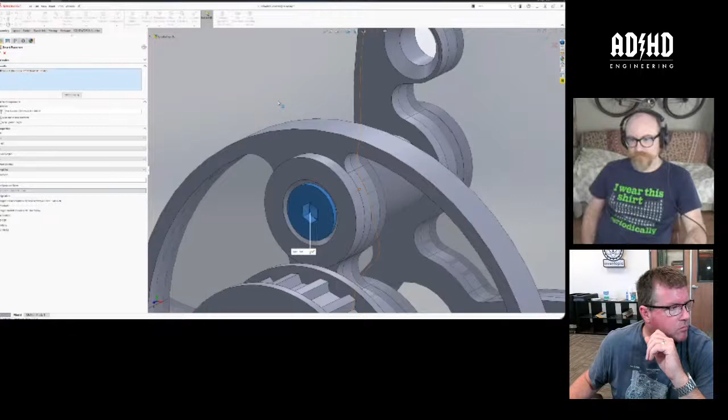And it's nailing down this process so that we can invite other people, like you guys, for example, to do parts for this. We have to come up with a more robust workflow than what's going on in Fusion right now, because I don't want to trash talk Fusion - I do it enough in my head, believe me - but there's a lot of ironing out you have to do, especially when you're making something that's not a bookshelf and you have 50 people working on it. Some standardization has to happen, and I think those single mega sketches with 50 sketch profiles, I don't personally think that's the answer. I think part of it comes from people assuming that's somehow less processor intensive, or that it makes the timeline shorter and therefore more efficient. Somebody used that term this morning, efficiency, and in reality I don't think that's efficient. It's maybe shorter, there's some brevity there, but I think it's inefficient because it does not convey design intent. I think it's the opposite of that, actually. But anyway, yeah, I definitely see what you're saying.

And by the way, for people on YouTube, sorry, we lagged out - YouTube ended the stream before I could reconnect. So now we have two streams today, and the other one ended without closure. Hopefully both people watching will reconnect. I think one of them was me. Yeah, I'm probably the other one. We always have more people from the Discord server than on the YouTube channel, but that's fine.

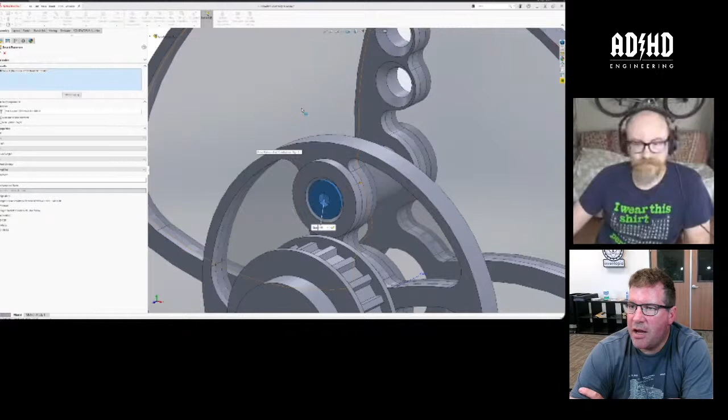So I just selected the length because I know that's how deep it drilled. There's a standard length of drilling that SolidWorks will do if you don't tell it to do something else, and that's dependent on the fastener. So an M8 fastener like this is going to be, I think, a 19-point-something millimeter depth, and that's just how it does it. You can tell it to go longer, and I think if you do, that 25 millimeter fastener would probably be right. But either way, in terms of what I smart-chose, fastener and feature, right?

Let's say if you have a screw, right? You have a plate with a clearance hole, and then another plate that has the threaded hole in it. For it to update those other things, do you have to tell it that this is a threaded hole on the far side? And is that an argument for using the hole wizard rather than just trying to make an appropriately sized hole in the sketch? You know what I mean? Do you have to tell SolidWorks that this hole is a whole entity which is threaded and it's M6? Do you have to provide that information on the front side?

I'll show you, just give me 2 seconds here. 1, 2. The answer to that is basically no, you don't have to do anything special. Oh, so here is our... wow, my computer's really good.

I have definitely actually manufactured a part and drilled the holes at clearance size when they were supposed to be 1/4 inch tapped holes, and only realized once I was trying to put it together. I said, 'Oh, these holes are too big, I need to tap these.' When I was designing, I just put a 1/4-inch hole in there, and didn't catch it in CAM, and I had to remake the part. Not my proudest moment as a machinist, but the thing about using the hole feature that I like is it avoids that exact situation.

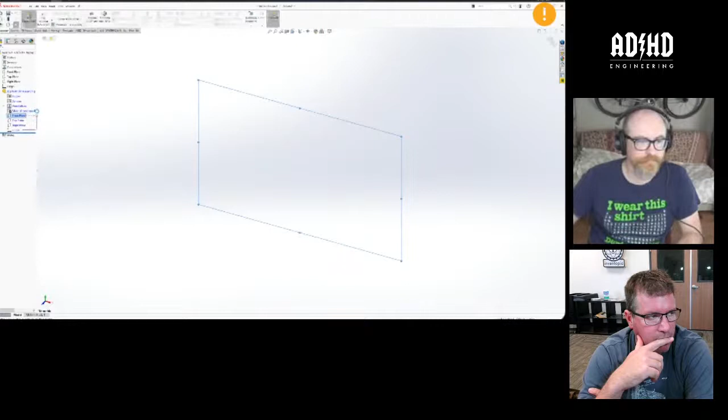Right, I'm about to show you. I just need to make... always make the fastener holes undersized, that could also be a solution. Yeah, and then you have a pilot hole to make them correct. As I'm designing stuff, if I have to slow down and provide that kind of information, it breaks my train of thought a little bit. Sometimes I just want to put these holes in so I can move on to the next thing. It's probably not a good habit.

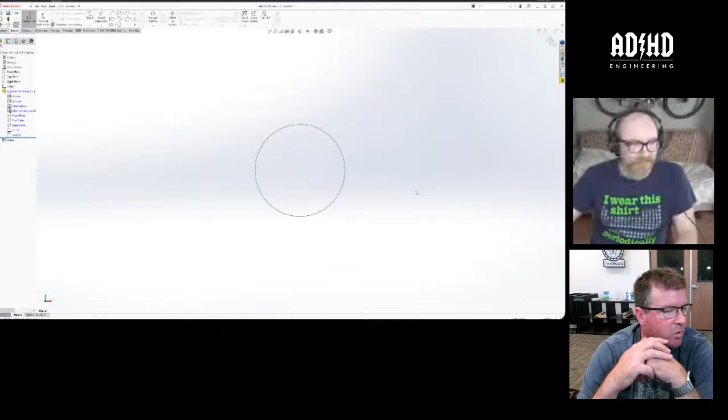Wow, my computer is so goddamn slow, what is going on, this is nuts. I don't know if you've been using much Discord streaming, but for my phone at least, that's the only case where it ever gets warm, when I even watch a stream on Discord. So I think Discord is really crappy performance-wise. I can literally utter 5 paragraphs before my mouse even responds to what I'm saying. This is so stupid, okay.

Sketch is done, now I do... come on, extruded boss base. Come on. Okay, let's go, let's go 20. Okay, so own it, let's... copy it. Let's see, another one. Well, you're making two bodies, come on.

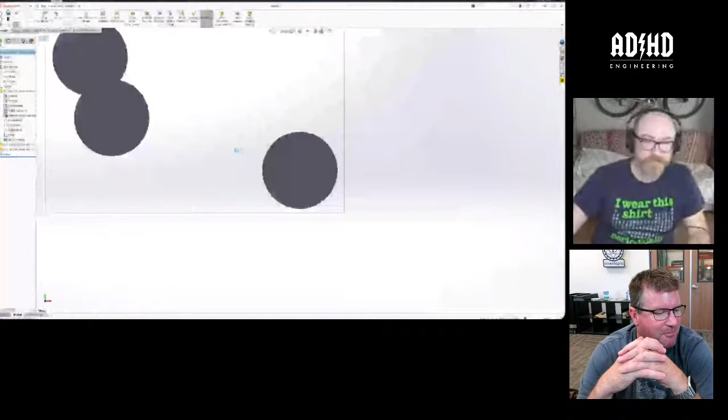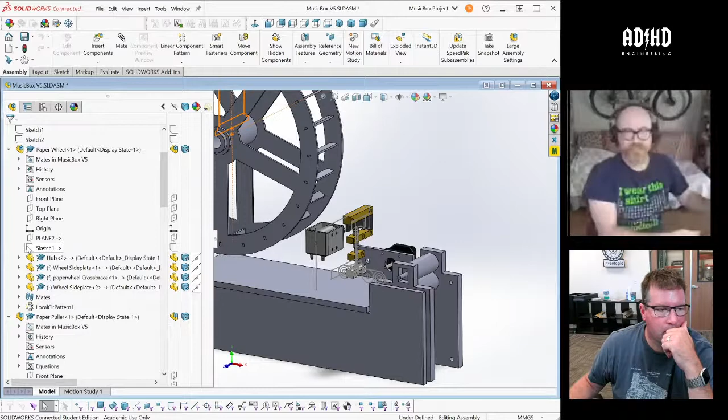Wow, painful. Actually, what's the state of that? Oh wow, it's totally melted. Your ice block has melted? Well, just a second, so it's one of these guys. Hold on, I gotta put it back in the freezer. Put it in the freezer. I don't know.

No, why can't you just liquid cool a plate underneath your laptop, like the cool kids do? I'm just kidding, no, there are no cool kids who do that. Ice blocks, there you go.

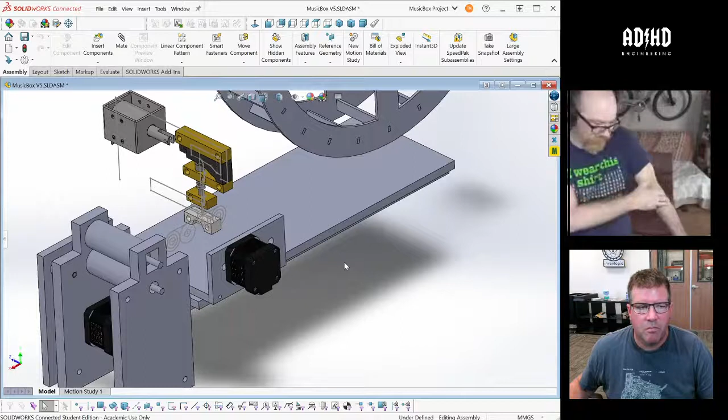Okay, so if you ever order HelloFresh or any of those meal kits, they come with a block of gel that you put in the freezer if you want to keep them. Yep, and that's what it was sitting on, and it literally melted through that. It's probably not great for the computer in the long term being around cold, wet stuff, but the thing is, look at what the computer's doing now, it's literally frozen. So I just put it on some even colder ones, these are from... this is so dumb.

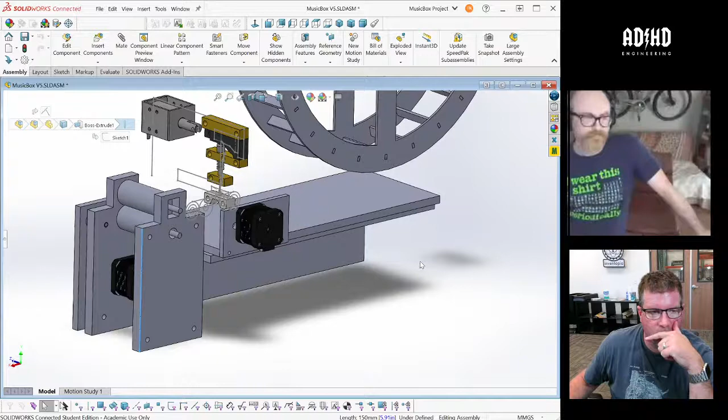It's good, let me... no, because I want to explain this feature. In order to do that, I needed to make 3 circles to drill through, and I can't even do that. Oh, maybe I should do it. Maybe you can coach me.

Okay, should I make an assembly or a part? Make an assembly. Okay, wow, I have my default resolution much larger on my monitor, so maybe people on YouTube can actually see the commands, and it'll be easier to see. All right, so I have an assembly with three different parts inside of it. Yes.

That's part. Okay. So David, can you hear me?

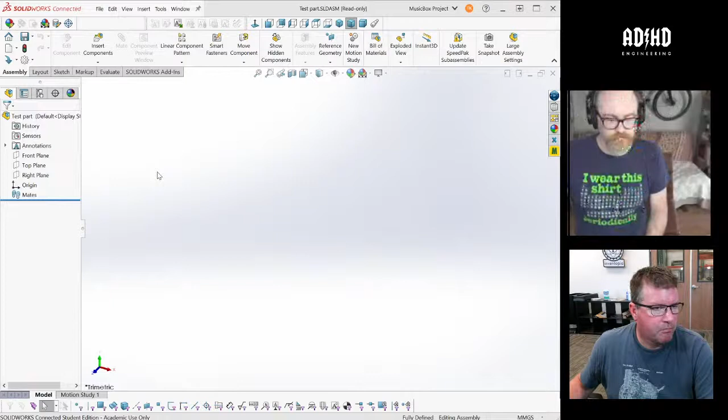Apple needs to come out with the M1X sooner, or the bigger one they always talk about, the 32 core version. You mean the Apple Silicon? Smoke everything.

Let's see, so I'm going to... oops, what the heck. SolidWorks is throwing me an error. Do you ever have that where you don't know where the error dialog box is?

New part. There we go. So yeah, get it. So 3 parts in one assembly?

Yeah, you were super low resolution, by the way.

Yeah, I need to call good old AT&T and ask them why the fiber optic internet service that I thought was going to be great for streaming is not as great as it should be.

All right, yeah, I mean, I can't really even see anything. Can you make... oh, I don't know if that's going to make a difference, but.

Are you watching my stream, you can see on Discord? The circle, you can't read anything. Oh, because I'm super pixelated. Yeah, interesting.

Oh, maybe I'll stop moving stuff for no reason. But I mean, I'm also on 4G from Sweden, so yeah, that could be the reason. Yeah, it's a...

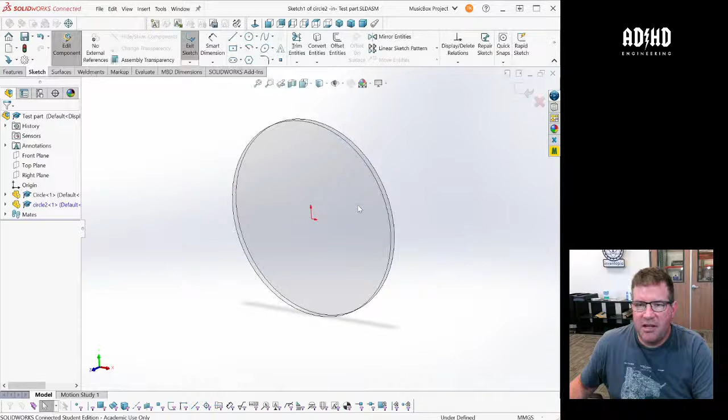By the way, SolidWorks Connected, even simple things like making a new part are difficult. It takes time.

All right, so this one's also 200 millimeters, but it's offset from that guy by 100 millimeters. And it's going to be... all right, so I have 2 different parts.

Now walk me through it, David. We're doing smart fasteners, right? He said 3 parts. 3 parts? Okay.

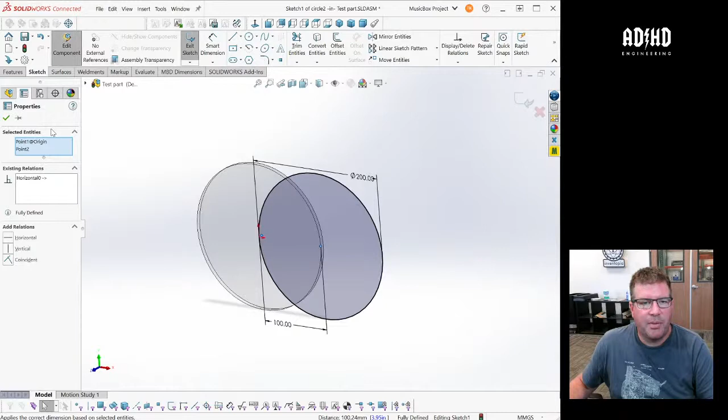It's pretty bossy, if you ask me. All right, so we got that part now. New part, bar.

Hey Brandon, do me a favor, can you grab one of the beers in there and bring it to me? Yeah, it's beer 30, the bluish one. Yeah.

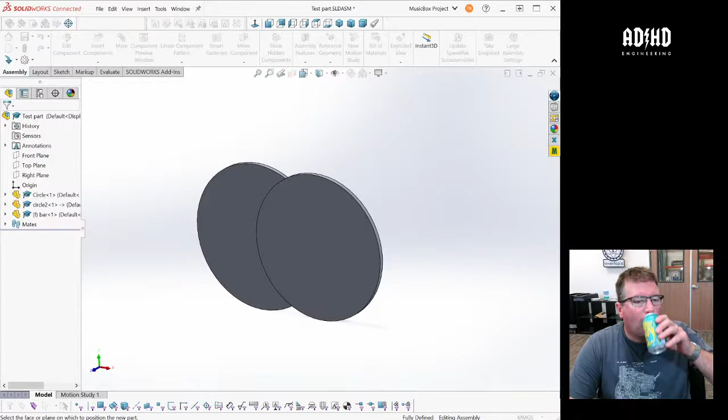A lot of times, yeah, I mean Sierra Nevada and Lagunitas and Tail of a Whale, I don't know, there's many of them. A lot of times the good stuff never makes it very far. Anchor Steam before, but that one is not available anymore. I don't know why, that was really good.

I love the... I have a feeling like the good beer and wine, I'm a former winemaker, which is why I like beer, never gets the best stuff. Actually sometimes on a national level, like Argentina makes some great wines apparently, but none of them leave. So okay.

All right, so we are doing... I'm assuming David's going to come back. I think we just completely lost him. I mean, we already lost him a small while ago, so I guess.

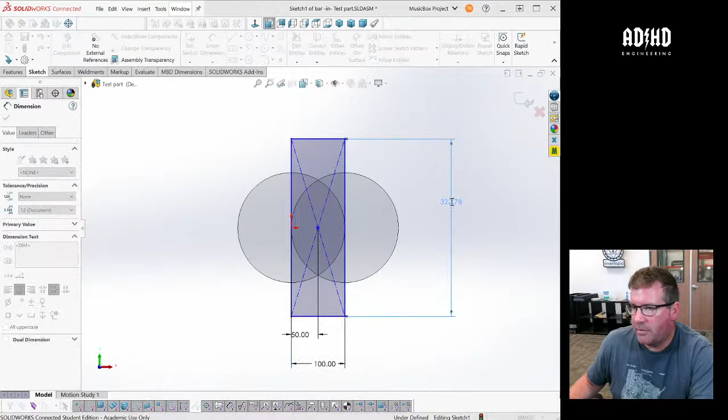Yeah, I noticed actually it might be on Discord, because we had 5 people in the Discord channel for a while, and now it's just you and me. That's true. So who knows?

Yeah, but now your quality is up again, I can read everything. Huh. Yeah, I have a feeling... only watching in a window, so yeah.

I've been threatening to call my internet service provider because it's fiber optic, so there's no reason why it should be like this. They probably just want me to pay more money for higher bandwidth, or they've artificially capped me, something like that.

In Sweden, we have a company that's basically cable TV, and you have fiber to the connection box, and then they use normal coax from there in their network. That's weird, so it's like hybrid fiber, they call it, not fiber all the way. What's weird is that coax isn't electrical, it's radio signals, right? Yeah, exactly, so it's basically fully analog, but in a cable instead of air.

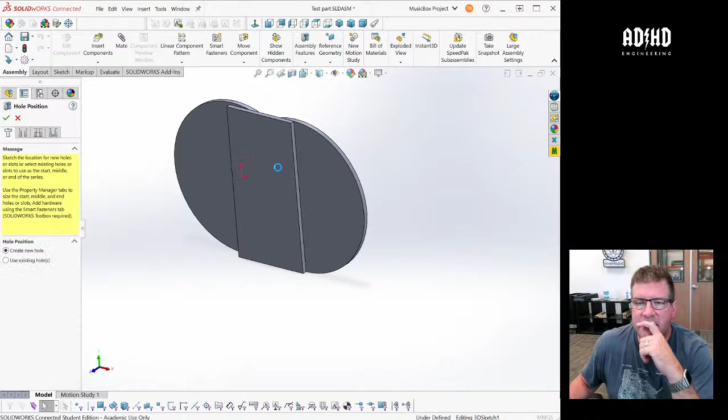Really interesting. All right, so even though David's gone, I think I found what he was talking about, which is assembly features right up here. So hole series, we're just going to play with this. Sketch the new holes or slots or existing holes. So, wow, okay.

Okay, what's the position? Counterbore. I think there was a whole... oh yeah, size 0, 0. So let's say this is, let's do metric, ANSI metric.

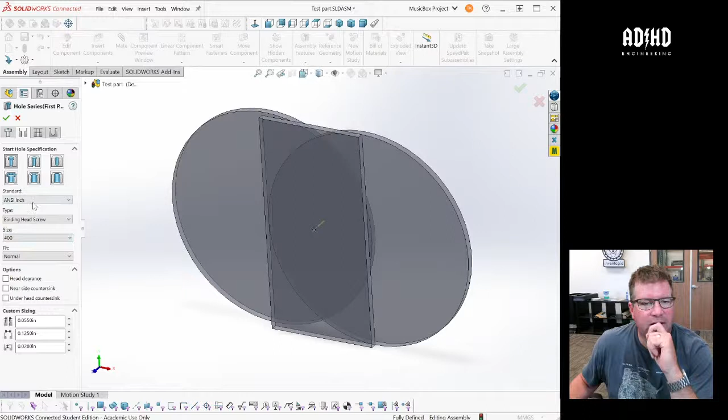Oh, so it actually is making the fastener and the... wow, that's super nice. Cool. And you can do countersink and everything in one. Oh, that's super cool.

Could you choose where to thread it as well? Let me look. Because this is just a through hole now. Yeah.

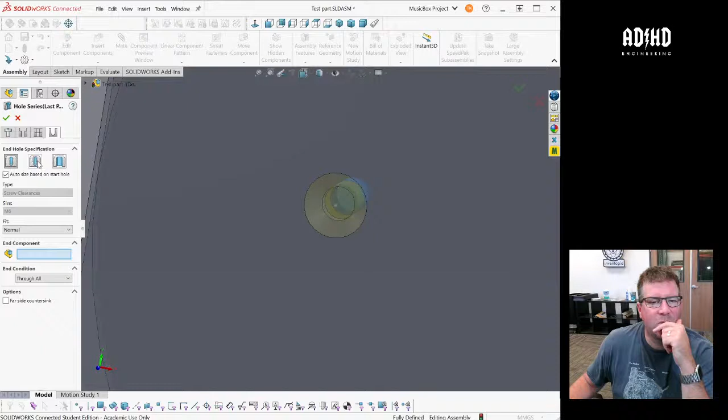What's this? Middle hole specification. Auto size based on start hole. End hole specification. Yeah, there you go. And the end one is going to be bottoming. Well, there should be a through tapped hole. No, here we go, tapped hole. Yeah, and you can have it bottom out halfway and stuff. Oh man, that is super cool.

Another point for SolidWorks. Yeah, because the alternative is to edit a chamfer in this one part, and yeah, that's super cool. What's weird though, is that's an assembly feature up here.

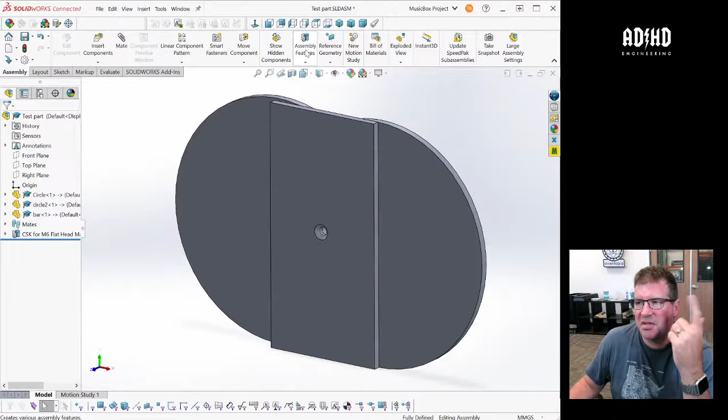And the way we normally draw stuff is to have the holes and then line the holes up against each other, so you're doing the alignment of the assembly with the bolt holes you've made for it. You're not doing the bolt holes later. Yeah, exactly, this is super cool though. It kind of changes my concept of how you would do this. I mean, then everything is already done, and then you just put in the holes where you want them. Yeah, it's like the backwards way of doing it.

I mean, I would always define like a common, like, oh, this is the origin, because here I have a bolt hole that I know will... right, yeah. But maybe if you have reference geometry where you just kind of say this is the bolt hole location, and you just have a point but don't actually draw the feature, then you can do the alignment based on where you intend to have a fastener, if that's the thing, right? I think on the MMX we have a lot of things that are concentric on shafts, right?

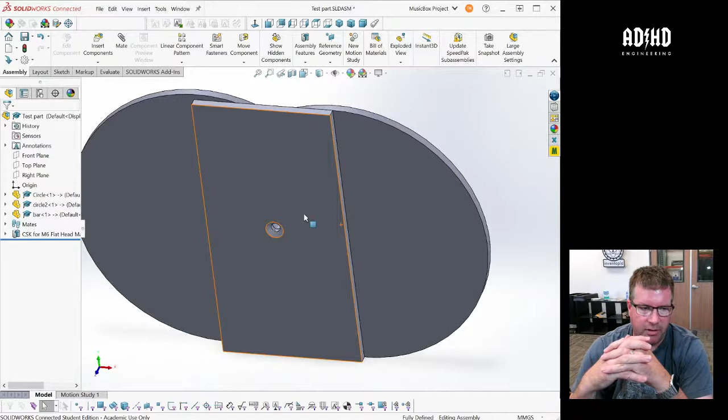Oh, now Mr. Comcast is back. Hey, I'm not back, well, I am. He's on his phone. My Wi-Fi is... no, I'm on my iPad. My Wi-Fi is down, I don't know what happened, but there's nothing on my Wi-Fi at all. El Monsieur iPad, it's funny. So I'm just going to be watching, but okay.

So we figured it out in your absence, David. We wouldn't have known that it existed. Okay, but we figured it out. We did an assembly feature, basically added an M6 bolt through 3 different things, and we were looking at it, and it looked like the middle hole specification, the end hole. We added a thread to the end hole. It gave us the tap drill for an M6 as the bottom hole, and it gave us a countersink on the top side. It was beautiful.

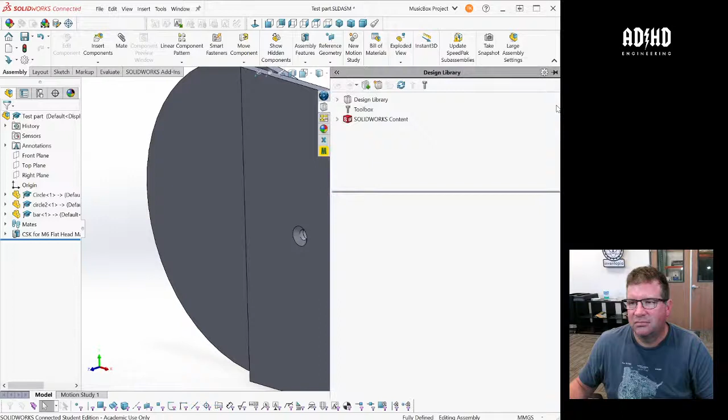Yeah, if you want to avoid interferences after you put the fastener in, then just make sure you select the one where it actually drills a hole that's the same size as the major diameter. Right, I don't know if you did that because you went pretty fast. But the other thing is, if you have your toolbox loaded before you start that, then you can add the fastener in that feature, you don't actually need to do it separately.

Oh well, let's try it again then. I just loaded the toolbox, I didn't have it before. Why is it so wide? Yikes! All right, ANSI metric, bolts and screws.

Are you going ANSI, huh? Oh, what should I do? Well, I would just pick ISO personally, but it's your call, you can do what you want. I don't think I know the difference. Well, I think functionally there probably isn't one. Yeah. But this is a European project. Good point.

Who is that? Sorry, who is that? Someone very cute, that's my 3-year-old.

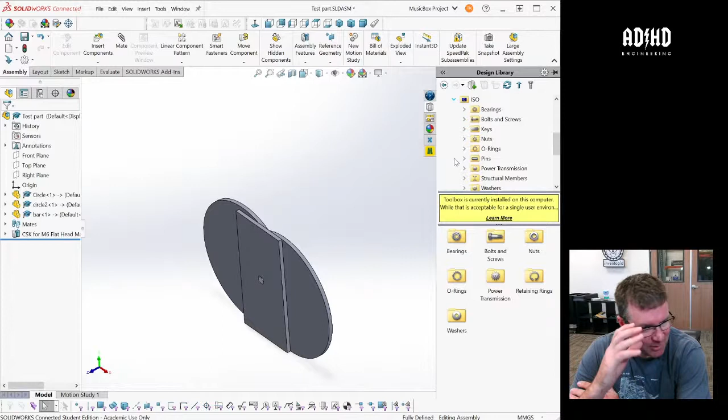That happens with Maureen all the time, and she's very clear she does not want her kids on YouTube at all. So it's always drama if a kid rolls into a room and starts making noise or is on camera. But she has a kid, maybe 4. Yeah, I love that. I love the kid intrusions.

All right, so let's try. He's just playing Fire Track here. I can have him on if you want to hear, but I guess... So we're gonna do another hole series, we're gonna put it there.

Oh yeah, now you got smart fasteners available too. That's good, I see it. Oh yeah, the smart fastener tab is there. That's cool. So this one's going to be an M10, countersunk and counterbore. The last one is also going to be a threaded tapped hole, M10. Make sure you select the end component. There you go.

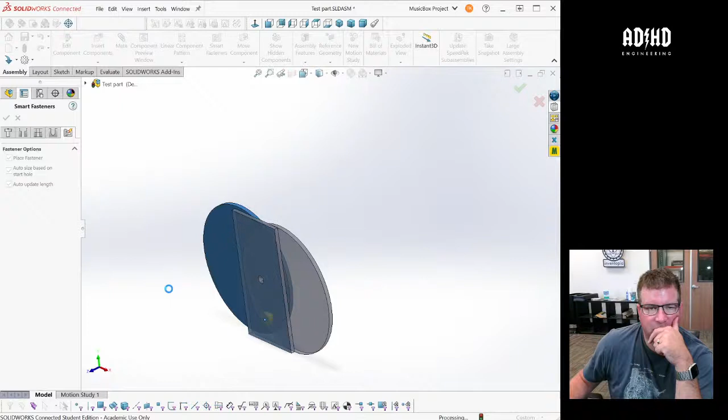Awesome, place fastener. Working. And I guess you can define how much stick out you want, and the length and everything. Yeah, you can do all that stuff. Oh man, could you add nuts on it and washers and stuff?

As well? Yeah, you see how it says add to top stack right there? That's where you put washers. Oh my gosh, that's the top stack. What about the bottom stack? Pull down on that menu. See, there's a... there you go. Oh okay, never mind, see, I added a washer up here.

Well, because you threaded the bottom one, it's not going to ask you for... Okay, well let's go back then, see if it's a clearance hole. Now I'm going back. Yeah, there we go, bottom stack. Dude, that is sweet. Wow, regular flat washer.

That is... now, what would be awesome, Tim, is that it allowed me to...

Kooky saying, "Don't tell Martin about the washers." That's so true. If you're like, okay, how many washers can I add here?

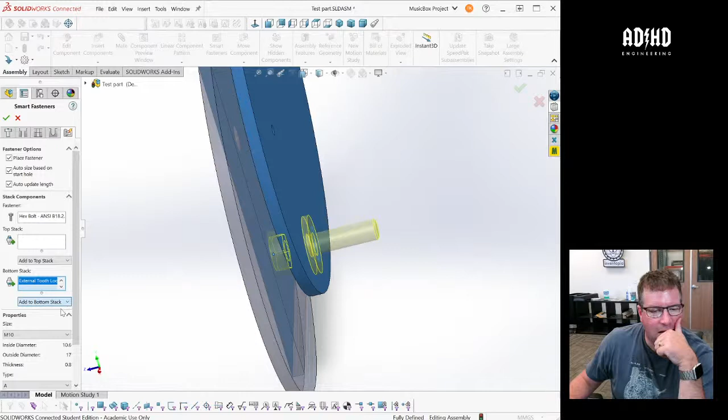Oh man, so external tooth lock washer, adding that on there. It takes a second for it to populate, but there it is. Hot damn. Yep. Hex nut style 1. I don't know what these... does it have the entire McMaster catalog here, so you can do?

I hope so. So okay, I'm glad you brought that up, Lance, because the one downfall to all of this is that they're not currently set up to have McMaster part numbers assigned to the smart fasteners, so the McMaster add-in isn't going to see them. Yep, and I actually haven't really tried to override that somehow. I want to figure that out, because it gives you that shopping list. Damn, yeah, look at that.

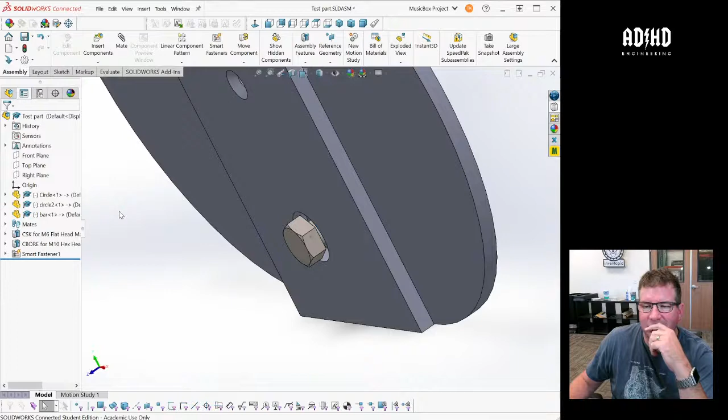Of course I did, this is not right. I added... I have to change that. Yeah, but Tim, this is CAD, man, this is how you design stuff. Yeah, this is the simple stuff. Yeah, and I know it's exciting, but...

Yeah, what did I do with the fastener? I need to change that. Hex bolt. It was something you did in the first... I mean, you added the washer to the top stack. It was the kind of hole at the beginning that changes. Yeah, but I would think that you...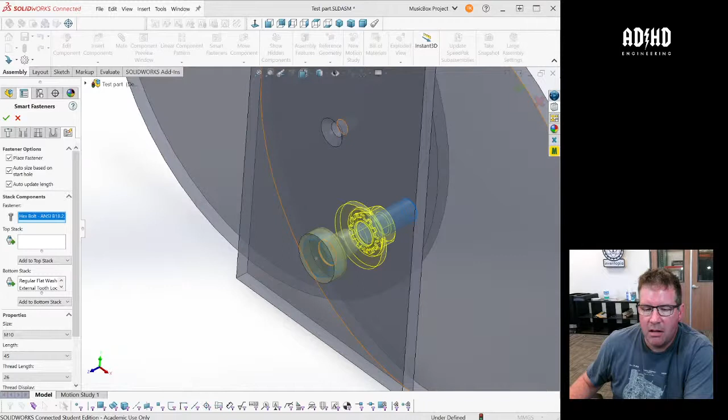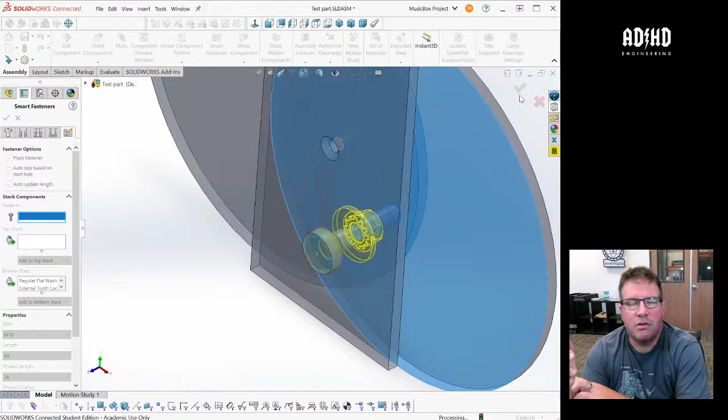All right, so David, while you were gone, we were asking about this, because a lot of times we use it in the context of an assembly, right? We will use fastener locations for doing our mates. So, like, let's say over here in Music Box Land... no, this one. It's not gonna let me change windows until I get out of this dialogue. Okay, think about it, SolidWorks. But anyway, so if we can use this feature to basically populate all of our hardware, which I love the concept of, especially since it's going to add the nuts and all these other things, which you'd ordinarily be going into some library for.

Then it should be the case that, in order to mate different parts with a bolt in the assembly or even in a subassembly, we shouldn't make the mounting holes in the individual parts and then use them for alignment purposes. We should instead make a reference geometry, like an axis through that point, or a point for where the fastener is going to happen, and then align those reference geometries.

Yes, I'm glad you came to that conclusion, because that is exactly how you want to do it. But you can also use an existing hole, by the way, if you wanted to. I think using an existing hole is kind of lazy, especially considering you can do it here.

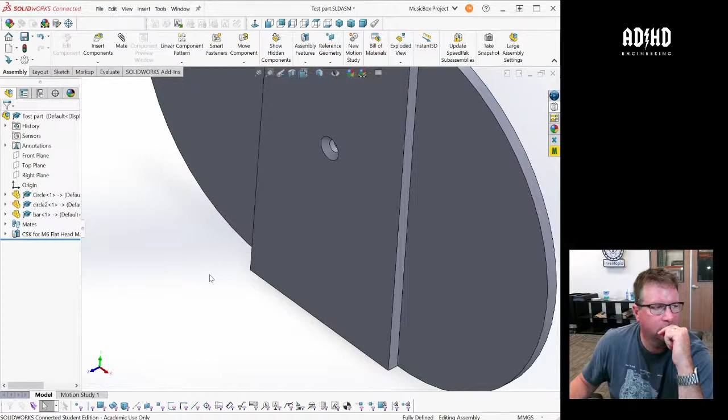If my computer hadn't crashed and I lost all my Wi-Fi, I'd be showing you right now how I built the crankshaft. The way the crankshaft and all the components are aligned, there's an axis that goes through it, but that axis isn't defined by the crankshaft or anything. It's defined by the intersection of the right plane and the top plane, and all the positions of the components are defined by offsets from the center line.

So none of the parts actually have reference features, like a face or anything like that. None of it is based on that. It's all planes. So if you do it with enough planning, you don't actually need to line up holes at all.

Well, I like this because aligning parts based on mounting holes presupposes it, removes your ability to change the mounting holes. Exactly. And I think that mounting hole should be a dependent feature, not a driving feature.

Right. So speaking of which, let's do multiple holes on this face, and you can edit the sketch afterwards. But before you do it, I want you to select a face.

Doing that guarantees it's a 2-dimensional sketch, not a 3-dimensional sketch, so when you go and edit it, you'll have a different kind of control over it. If you had just selected the feature, it would have made you go through a 3D sketch. But now you could put your holes wherever you want them, and then in that sketch, or even afterwards, you can do it just like the hole wizard, where you just put points where you want them geometrically.

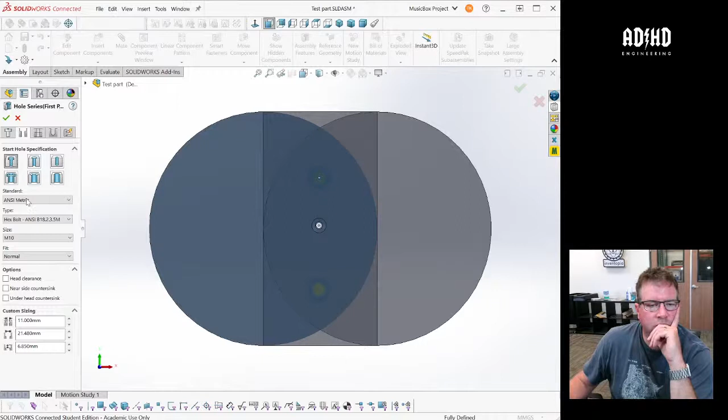Oh, so here's where I had gotten this. This is going to be a hex cap screw, and it's countersunk. That's where I got the other one wrong. Fit normal. Okay, middle point, auto size. Last one is going to be, end component is this one. End condition through all.

Place fastener. Love it. And now we have, I still have a hex cap screw. I wonder why it did that. Oh, that's weird, socket button. There we go. Actually, I didn't even want that.

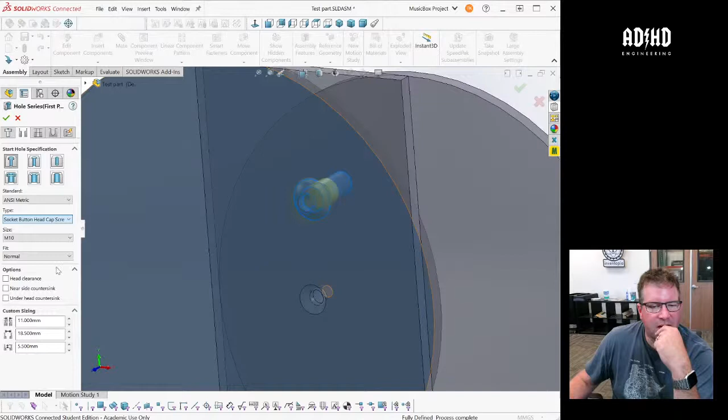I want socket head cap screw. I don't want it to be button. Yeah, there you go. It just takes a while. Sometimes you make changes and you think it's going to happen instantly, and it needs to talk to its buddies up in the cloud.

Does that fit? It does fit. And it's just, but you see now that actually the countersink is too thick for that top plate. I have an M10 bolt in a 6mm plate.

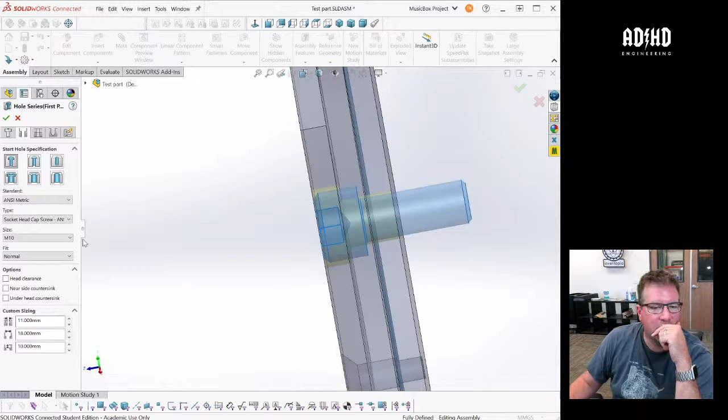So options, head clearance, is that it? That's probably it. No, that makes the counterbore deeper. Oh, or it makes it wider. Try a negative. Oh, it makes it wider? I think so. Oh, no.

It still doesn't line it up right. It's still lining it up from the shoulder here. Well, the shoulder is where socket head cap screws are measured from. Yeah, but it's not lining it up from the bottom of the countersink.

Anyway, this is super cool. We don't need to totally dial this in today. Yeah, right. But I do like the implications, I like discussing the implications for it.

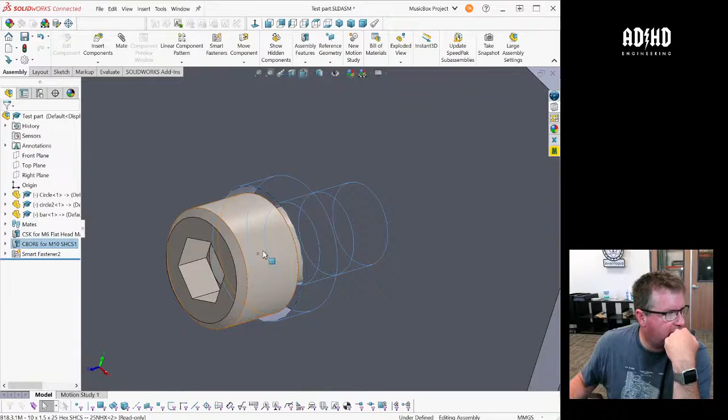So I think a big risk would be that you would miss clearances in the middle parts when you do it like that. You don't necessarily go in and check that you have the correct clearance in the sketches if you just add random fasteners later. Of course, that's part of it, but that would be my main question about this approach.

Well, there are two features we haven't even looked at yet. They're both under the Evaluate tab. One of them is, once you have your fasteners in there, you do what's called an interference detection, and you can also do an alignment check where it looks at your fastener holes and sees if they line up, and it will do that for you.

Awesome! You can do weld beads in this. Yeah.

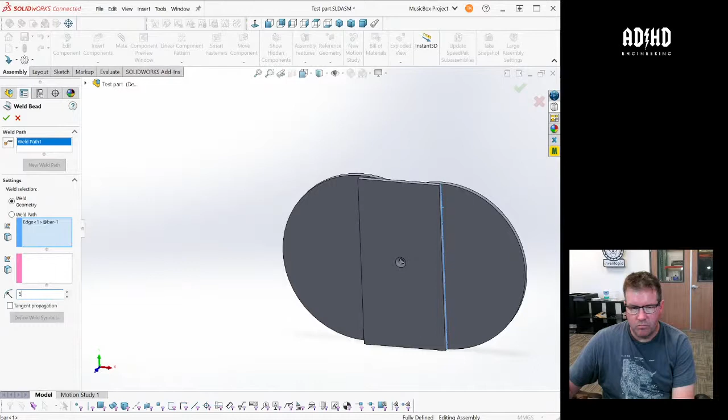Why wouldn't it do a weld bead for me? Weld path right there. Dude, did it do it or did it not do it? It didn't do it. No, I mean, I saw the weld symbol. Yeah, weld bead.

Oh, it wants to do it between here and here. It's looking for faces. Yeah, is that going to do it? But there's no representation of where the weld is. It's not like in the features here.

Right, but there's a folder in the feature weld tree. Folder—hot damn, there it is. Yeah, and they're both in there. Maybe I don't have visibility for welds on. There it is. Oh, that's probably it, actually. Yeah, yeah, that is it.

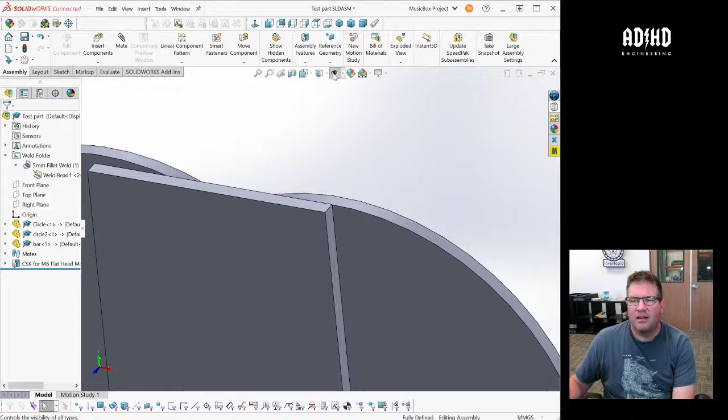Come on, delete that second one. Yes. I hate the fact that you can click this eye and not click everything else. Come on, you got to click the actual eye. I know, there you go. Click that, there you go. There's your weld bead. That is so cool.

That is so cool. Because, I mean, that's the other thing, right? We're gonna have a bunch of stuff, and we do have a bunch of stuff on MMX which is welded together, and so we have no way of communicating what that's going to be any other way. Well, I mean, this is how you just do fillets or stuff, but this is so much better.

We need to have like a list of reasons why SolidWorks rocks. Well, even when you're doing dumb geometry like this.

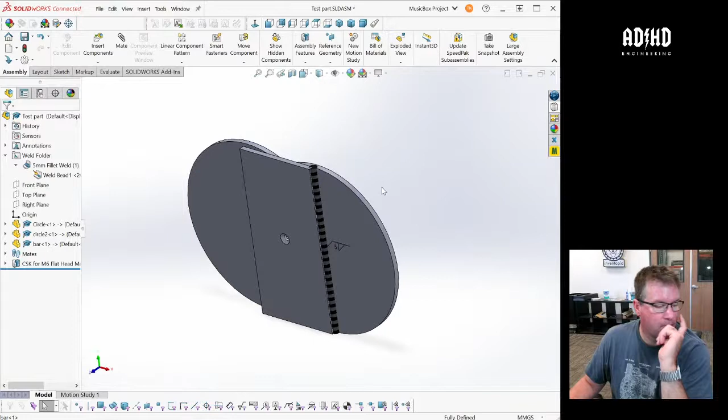Yeah, I just had that conversation with somebody on CAD Team Chat this morning. He basically started—like he couldn't find a feature in SolidWorks, and I told him how to do it, and he's like, 'Oh, but that's not easy, it's so much easier in Fusion.' And I'm like, I don't know, I kind of disagree that it's easier in Fusion. I think with SolidWorks, once you discover a feature, first of all, you almost can't live without it. But secondly, it turns out it's hiding in plain sight half the time.

I would say that doing things accurately, SolidWorks is probably better, but doing a quick sketch and not defining any constraints and stuff, then Fusion might be faster. Yeah, I don't know, could be. I agree with that—I'm quick and dirty. I think Fusion is the way, but yeah.

But then you get all the CAD files like Martin did them. So, right, yeah, I think if you are in the design phase or the brainstorming phase, Fusion is better—it's just easier and faster, I think. But if you're going to be manufacturing something... I mean, yeah, and I do get that there's a learning curve, right?

Like this one with the Weldments feature—like knowing how to use the Weldments feature, I have angst trying to do a tubular frame or something like that in Fusion, because I know there's a really easier way and I don't have access to it, and it pisses me off.

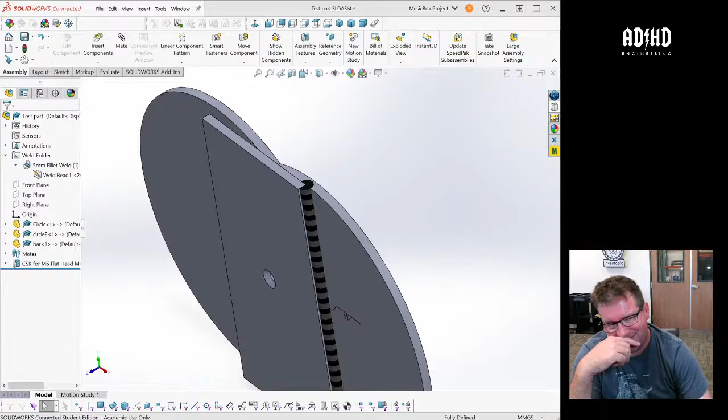I talked to Sean O'Neill just a couple weeks ago, and it was funny because when we started this conversation, one downside of using SolidWorks was that it was less accessible to most people. So we started the conversation with them saying, could we get 80 seats? That's a lot. Part of me likes the idea of a smaller team, since 20 people is still a lot, and I don't think we've ever had a parts assignment with more than 20 parts being worked on at one time. So I think it's going to be a reasonable sized team, but you're right, David.

The ability for people to participate in the ideation phase in SolidWorks is going to be much better when that licensing changes. And I'd say this kind of project, where no one is hired to do it, people switch in and out all the time, and moving licenses around is much easier if you have more to spare. Otherwise you have to really keep check on everyone, like are you still working this week, or can I change it to someone else. Well, this is like most volunteer organizations, right? You might have 100 members, but there's like 10% that do most of the work, so it acknowledges that as well.

Cool. So what the hell happened to my Wi-Fi? What was it, David? I said, what the hell happened to my Wi-Fi? I don't know what happened, it just decided to crap out while I was talking before.

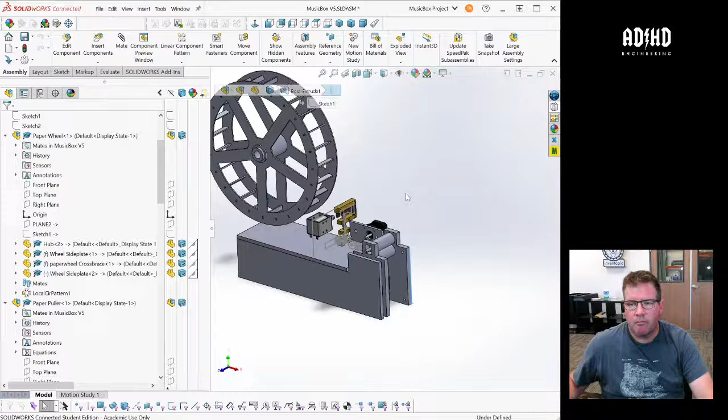The idea is that you build a mate reference in advance, so that when you drag a part in, which you can do with two windows open—one with the assembly and one with the part or subassembly—that mate reference will make it so you don't have to do any mating whatsoever. You just drag it in and it populates instantly in the correct spot. So if you build your reference geometry like planes, or points if you want, or axes, in the right spot for whatever the mating component is, and assign a mate reference to it, then just drag in your part and there's literally no work whatsoever.

It's just done, and I think that's the best way to do it, because if you drag it in and it populates upside down, that means you did something wrong setting that reference in the first place. So it's just as easy to say, never mind, delete it from the subassembly, reorient the mate reference to the right way, and drag it in and try again. If it goes properly that time, then okay, I did this right.

It's sort of like a check on if your geometry is correct. So that's a good thing. And once you do that, then you're good. So, subassemblies, nested subassemblies, etc.

I wanted to talk about the mate references in relation to that, and one of the reasons I picked the shaft, which I'm sorry I never got a chance to show before my internet died.

Is it on the cloud? Could I open it through, or is it in your own storage? Well, I think I made my space visible. So if you go to my, what do you call it, collaborative space, you should be able to open it. It should be called crankshaft assembly. I'm looking for it.

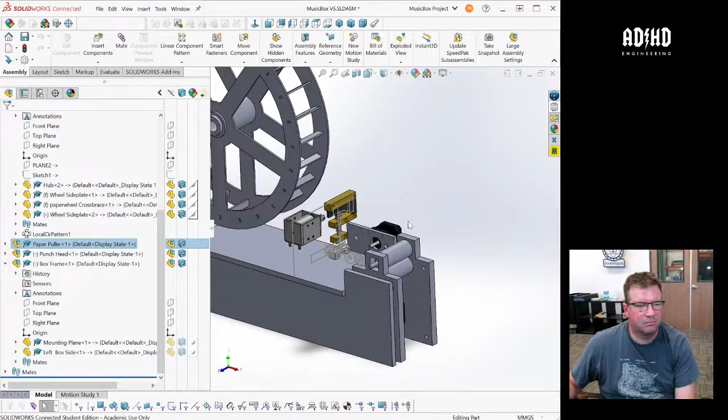Okay, so you would have to place that reference somewhere on this and name it the exact same thing as whatever the next level up assembly is that it's going to be mated to.

So that would be in this punch head. I'm going to open this guy. So if I'm going to take this guy out, well, let's suppress him for now. So if that motor that I just edited was right here, and it needs to come to this motor mount, I have to give it the same.

Yeah, so you go to that reference geometry, mate reference, and then do the exact same thing. You pick the face, the other face, and then whatever the third element that you picked was. Okay.

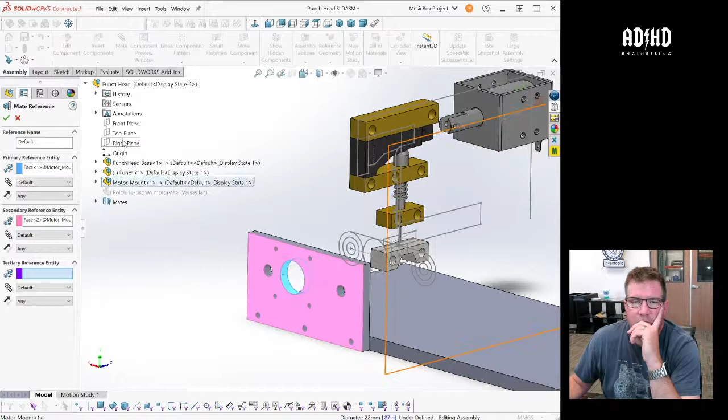Let's try that. All right, and you should be able to just drag it in. Okay, if it didn't populate automatically, then there was something wrong with your mate references. Well, I don't think I actually deliberately named it.

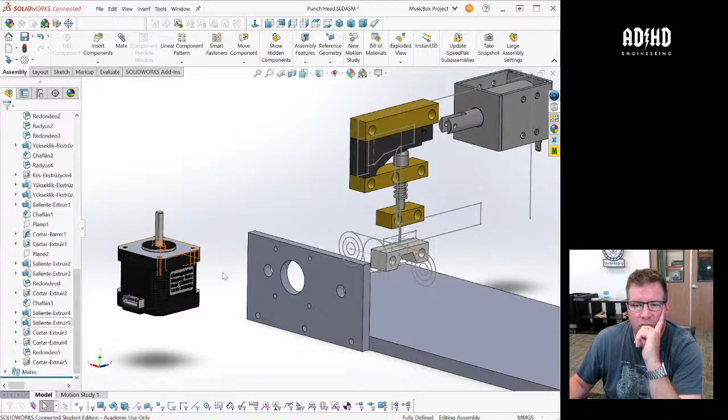I think the third thing you selected was the center plane for the axis, and I don't think you selected the same. Yeah, okay, so that might be an issue. But the other part is they have to have the exact same name. I forgot to mention that, I'm sorry. So if you call one Steve, you can't call the other one John. They have to both be Steve.

Yeah, all right, so this one's named Steve. Okay, and I'm going to open this guy. And amongst all the Ukrainian stuff, I'm going to... oh, there we go, mate references is in English. Add a definition, this one's also named Steve.

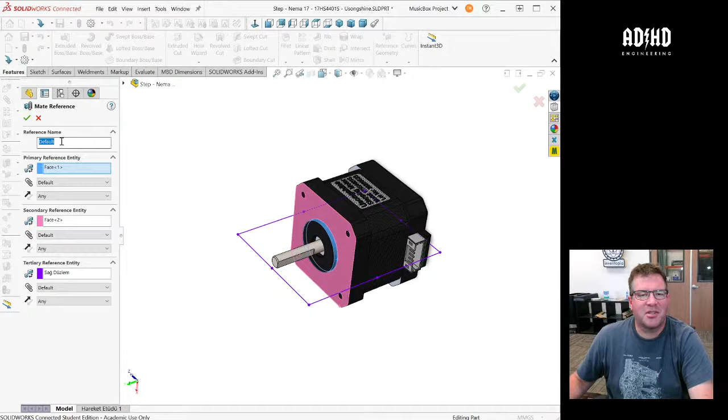Yeah, but you're right, so that third reference is right through the middle of it. And this is parallel. See, there I don't actually have to have the plane that I pick actually be coincident with it, it can just be parallel. Yeah, exactly, so that should work.

Right, all right, so I'm going to save that guy, and I'm going to swap back to this guy. And it's still saving, that's weird. Since I'm streaming the window, I have a progress bar blocking my whole screen, but you guys can't see it.

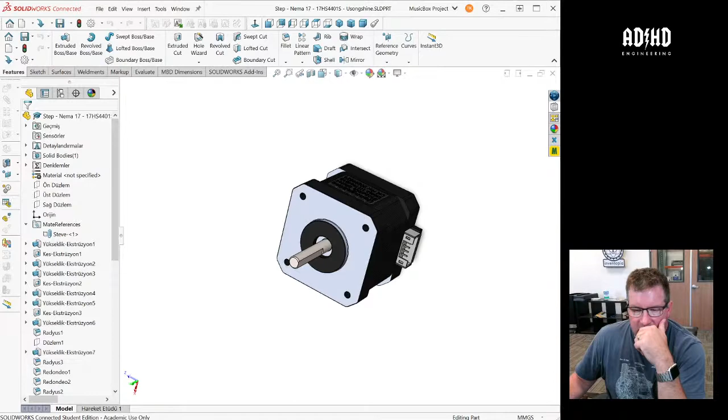All right, so now I go back to this guy. No, that's not the one I want. I want punch head, this one. All right, so now I'm going to delete that, and I'm going to try it again. Insert components.

You might have to drag it in. Like, I actually didn't do it this way. I dragged it in from, like, split the screen so that the left side is the subassembly, the right side's the part, then drag it from there.

So just configuration. Oh, I didn't realize you could change configurations. Yeah, configuration is something I've never actually used.

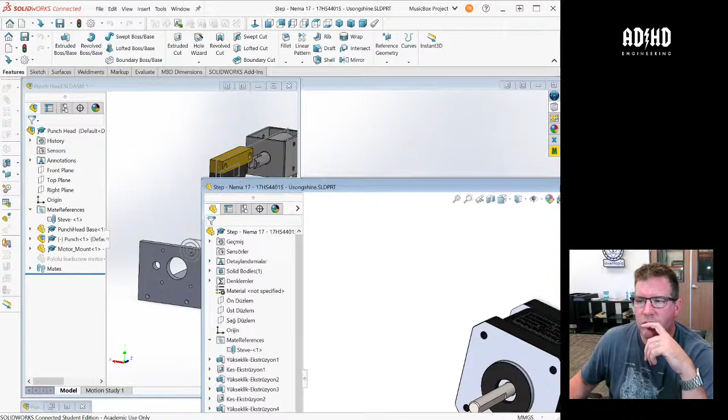So in the top right hand corner, you'll see the option to move to the left or tile. Pick your window, there you go. Now tile that to the right. There we go. Now grab the title bar, that's the way I see it usually works better.

Oh, it didn't do it automatically, which means something isn't right. It could be that you have to change the alignment. So I have Steve here on the left, and Steve on the right. Yeah, it only aligns, it only snaps in.

Sorry, if all of the parameters of that mate reference match each other and are applicable. So it can get tricky, but once you get it, it's fast.

So, but given that it's tricky, what is the application for this in the MMX? Because it seems that, or where would it be a better idea to do it this way than any other way? The reason is because it's really fast.

So when you build a subassembly, in fact a perfect example, to make the crankshaft assembly, all I have to do is drag in the shaft, drag in the crank handle subassembly, drag in the cymbal beaters slash flywheel pulley subassembly, and the rhythm machine subassembly, and then the third one is the crank gear subassembly. There's 3 of them on the crankshaft, and literally I can build, delete 5 times in a minute, and that's why it's beneficial.

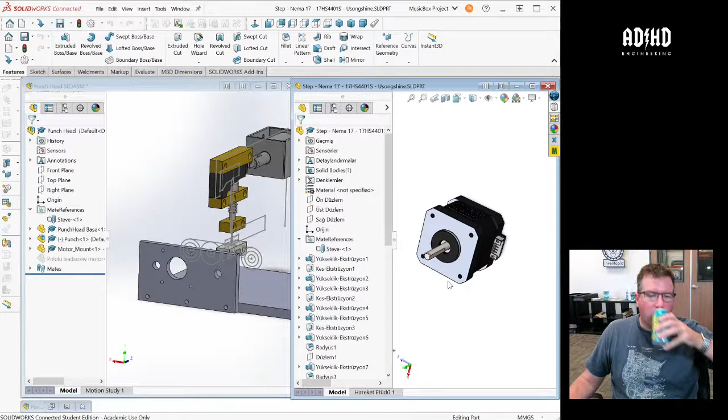Yeah, and if it doesn't work, that just tells you there's more to know, and when it does drag in perfectly, then you know it's good. And I can tell you right now, based on what I just saw, there's something wrong with that mate reference. Well, you know what's interesting is that it's trying to put it in here now.

I just dragged it in, and I can see here that it's... you guys can't see the tooltips that pop up on YouTube. It's interesting, so it's at least trying to do it.

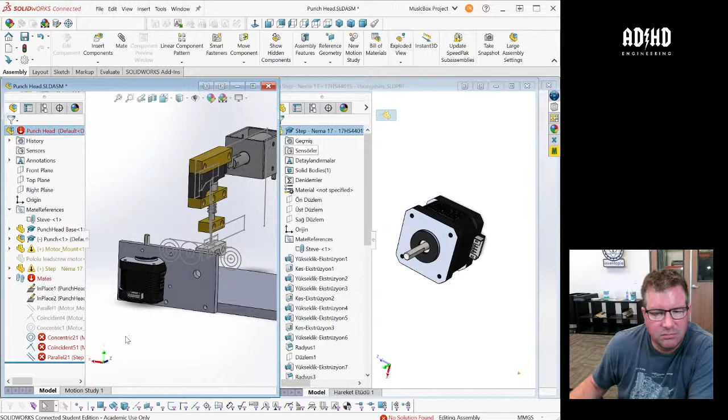Maybe it's because the constraint on the circle is equal radius and not collinear or something, I don't know. I mean, you had many options to choose from, I guess. Yeah, well I think what happened is that when I dragged it in, I had these cursors here where it was like I was trying to add a thing. Maybe I just...

Well, when it's working right, it's instant. All you do is drag it across into the window, and poof, it's in the right spot. Look, there's suppressed components. This mate cannot be solved because it has one or more suppressed components.

Huh, maybe it's because this guy is suppressed? Maybe it's the Ukrainian stuff. Yeah, oh that could be another thing, like you've got things interfering with each other.

Okay, well, but we do see, though, that it's coming in. These are... look at that.

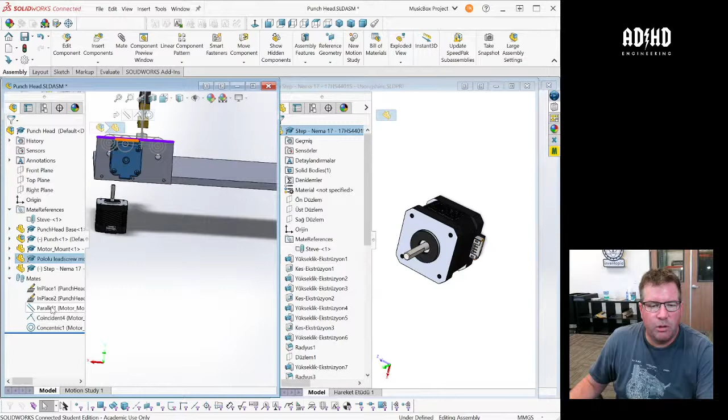It also might be that these two different things are, this is a derivation of the other component. See, I just renamed it. So I might be, because I'm reinserting something that's already been, I brought in the same part but then made it independent. It might be doing that. But when you look at these, oh no, this mate is there. This mate was, this is how... anyway, okay, that's cool.

So the question remains, though, when can we line up things based on very simple geometry, like individual points or faces or planes, and when do we use this other thing? Well, in general, what I've been going off of is to not use physical faces at all if you can avoid it, unless there's a very good reason to.

It's deliberately making reference geometry when you make the geometry that you're making, so that it interfaces with its neighbor's reference geometry. And also, making sure that when you mate something, you're mating it to something logically, not just because it's next to it.

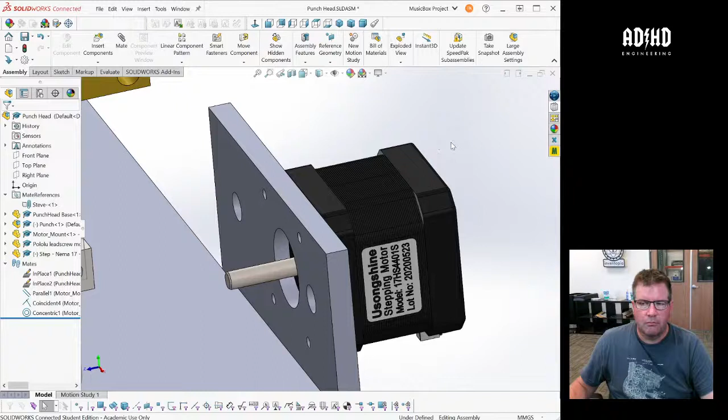For example, mating the motor to the face of that plate sounds good on its face, pun intended. But are you mating the motor to some kind of electronics subassembly, or is it some kind of moving other thing? Is there a reason you're doing it to those two physical objects directly, or does it make more sense to say, okay, this is the center of my face, or this axis and this plane represent the face of my motor, and this axis and this plane represent the face of this machine.

What does this motor report to? Does it report to that plate, or does it report to the machine? And then you pick which one you want it to do. So for example, not having seen this before, it's hard to tell.

So for this example, this mate that I have lined up here, this is a thing that actually kind of bugs me, even though I did it in this part, just probably because it was quicker. These parts are not really actually interacting on this geometry.

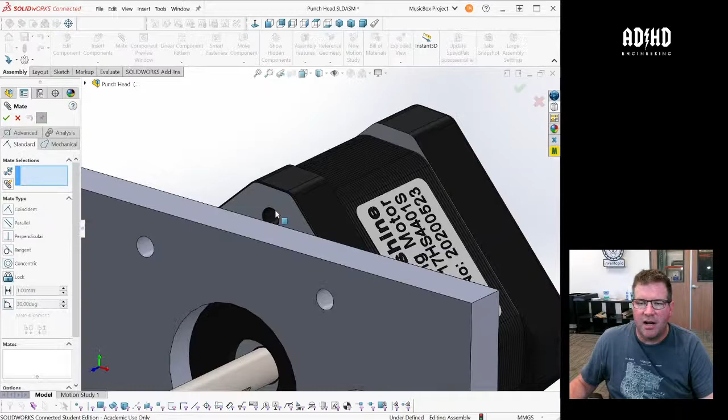So for me to lock the rotation of this part, I added this parallel constraint, and if I don't have that, then this should be able to spin. I've located it based on this little feature here in the hole. In the real world, they would interfere, and so it makes more sense to me to lock the rotation down by picking one of these and then picking the hole that it's going to go to. Is that kind of what you're saying?

Sort of. What I've been doing actually is picking mid planes, and making them coincident to an axis or something like that. It's hard to explain without me showing you on SolidWorks, but unfortunately I can't do that right now.

But what I'm trying to get at is, instead of mating a physical thing to another physical thing, think of a mate as plugging something that you have into the whole and deciding where it goes from there. It's sort of like taking your thing, going all the way up to the top and saying, okay, I'm taking this motor and I'm putting it in the music box, and then going down the music box and figuring out where the first place is that it's appropriate for it to go.

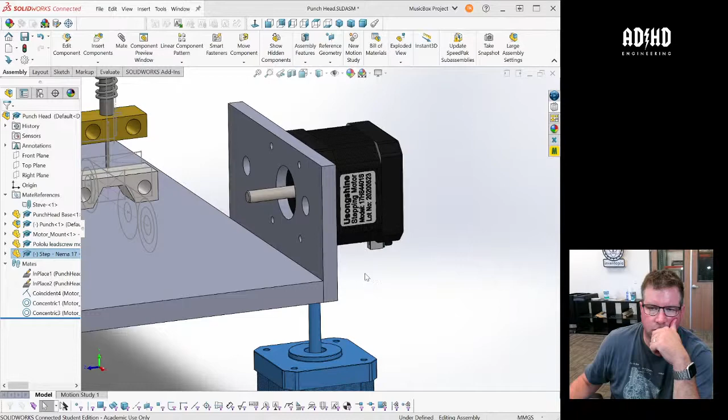So when I think about the crankshaft, I just built a crankshaft that's connected to a pulley, and that pulley runs the sun gear. So it seems like I am definitely putting it into the crankshaft. I'm not going above that. So that's the place I'm going to settle.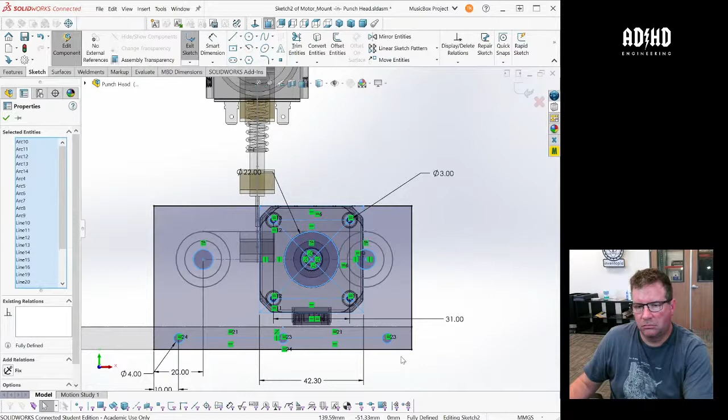But at what level do I mate it? Do I mate it so that when I turn the handle, it just spins freely because it's a free spinning thing, or does it drive the crankshaft itself? Actually, it's the interface and it drives the crankshaft. So I'm mating the pulley to the crankshaft itself, not to the shaft. I'm sorry, the crankshaft assembly, not to the crankshaft. You see what I mean?

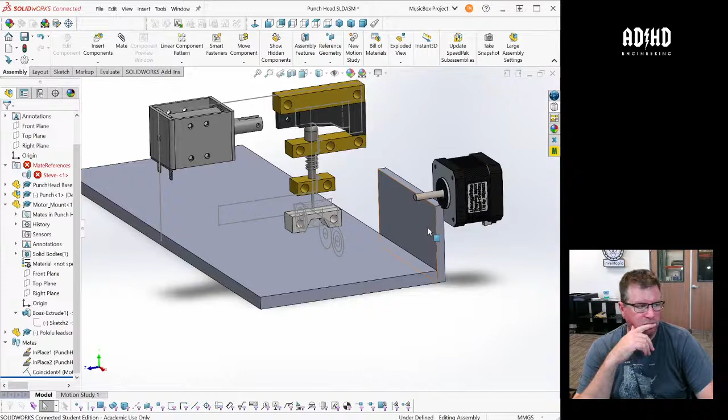That's the difference. I could mate it to the crankshaft, and then I would mate the crankshaft to the next subassembly, and then whatever. But I think it's better to mate the shaft itself to the crankshaft assembly the same way I mate the other stuff to the crankshaft assembly. That way, if anything changes on any of these things, then it's reflected downstream the same way, instead of having them be interdependent on each other.

And I don't know how to define that for your machine. It might be different.

Well, no. So, for example, if you see, I just went into this part. I have a motor mount plate that I had drawn, and I drew the fastener locations, and I drew where I wanted the stepper motor to be. And then when I brought the stepper motor in, I lined it up to the plate.

If I'm trying to make an example of what you're saying and apply it here, what I could also do is I just took away all the holes in that motor mount. I could align this thing. This is my reference geometry in the middle, right? I have 2 linear bearings, and I have where the lead screw nut's going to go.

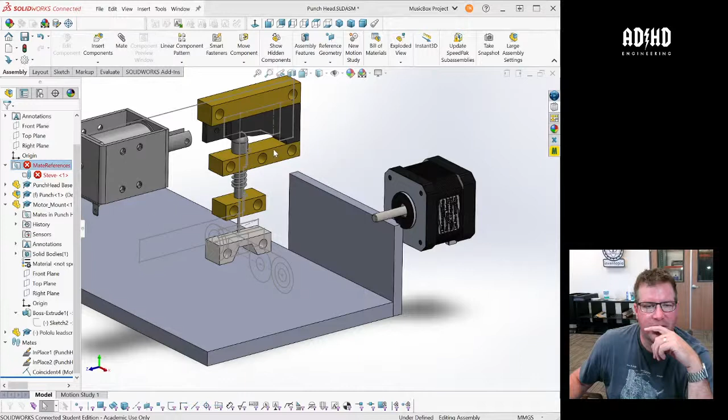Oops, that one moved. That shouldn't move. Sorry, let me ground that for a moment. I'm going to get rid of my mate references. All right, so I'm going to mate this to that, right? And because I have that, now I should be able to use it.

So I'm lining it up based on mating it to the reference geometry, and instead of adding the holes and lining it up with the holes, now I'm going to give it... do I need hole series or do I need hole wizard?

I just want to put the holes into this motor mount. The hole series will give you the smart fasteners all in one shot, so I would suggest that.

I also mentioned earlier that the hole series asks if you want to use existing holes, and you do have existing holes in that motor. Yeah, the first one defaults a little weird, but looks like you're doing it backwards here.

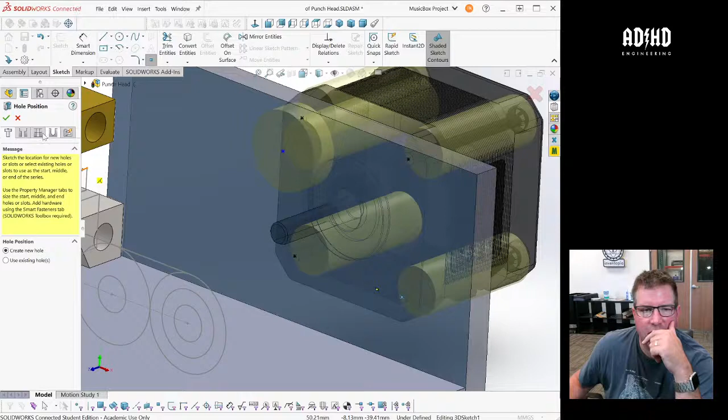I get accused of that quite a bit. Wait, do they bolt into the motor, or do they bolt? I think they bolt into the motor. Oh, I didn't realize the motor had threads. Sorry, I was working on something. Yeah, some don't, but I'm pretty sure this one does.

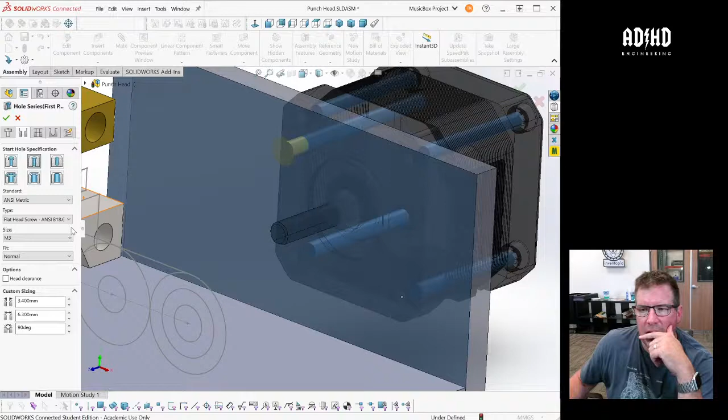Now I'm going to countersink these in because they're going to be there. They're not going to be M10, they're going to be M3. Remember, you can do this alignment once you've done the feature. You can actually go in and align them to the holes in a real sketch.

Interesting, so then the middle one, there is no middle one. End hole specification - this is the end component right here, and it is threaded. Interesting. So I want to go in, I'm going to say this is going to go in 5 millimeters.

Blind, no, this is going to be 5 millimeters. Okay, and the smart fastener, place fastener.

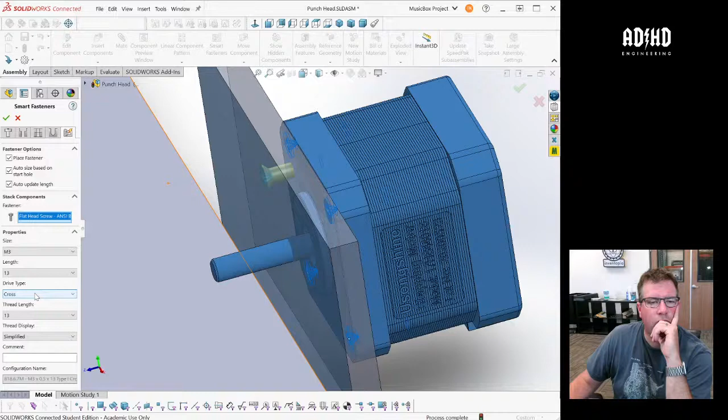I'm going to be able to go back and edit that first sketch, right? Because the first one I had to just place on the face kind of willy-nilly. Yeah, you might end up having to do a couple of visits - for example, rattle off a quick fastener stack, then go back to your sketch, align them, and then finish your fastener stack. I don't know, maybe you can, maybe you can't. It's hard to do remotely to show you how to do that.

Not flathead screw, socket, countersunk. There we go, yeah, it's easy to confuse those two. I actually did that several times at the beginning, where I picked, oh yeah, it's countersunk, and then it turns out it was like a Phillips head. I think I'm waiting for the... there we go. Sometimes it's not always intuitive.

I love this, how this is doing it. Look, now it's thread length. Length is too long, so we're going to go 8 millimeters. Auto update length - yes.

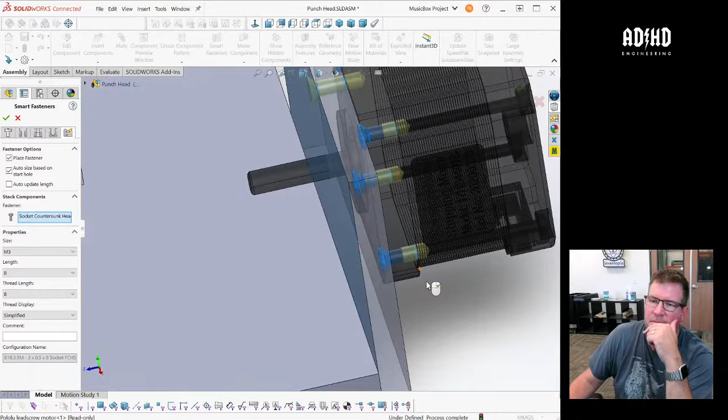Just remember that countersunk screws, the length is from the top of the head. Well, I can see how far they're going into my thing, so I know that is too much. That is awesome.

No valid edges for cosmetic creation. Interesting. Well, yeah, now I need to go into this guy and edit... oops, not that one. This guy, and edit the location sketch. Yep, and get rid of this one.

What was that? Sketch entities cannot be deleted from the derived sketch. Please underive the sketch before changing. What does that mean? Underive.

I don't know, you're going blurry there. I can't really see what you're doing. Yeah, I'm on cellular right now. In fact, I don't even know how much data this is hogging from me now.

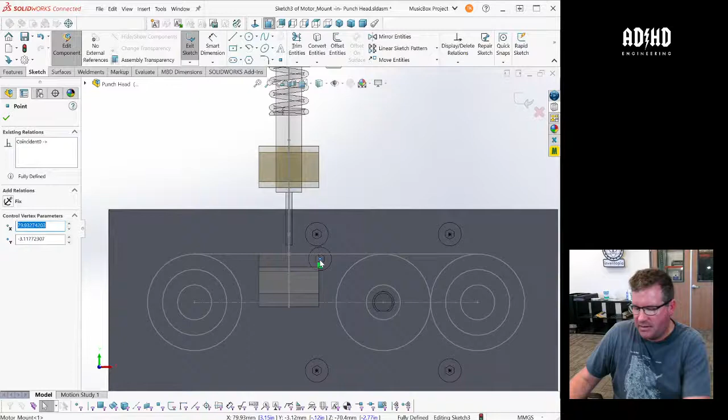Might be a lot. All right, now I'm going to edit this sketch and I'm going to delete that. What happened to my freaking Wi-Fi? What is up with this? All right, oops, oh it's... I mean it's buggy for me too. There's something messing up with Tim. It's probably my thing.

What's cool - so I actually deleted the... I was able to delete the hole, but not the fastener. So this guy needs to go away now.

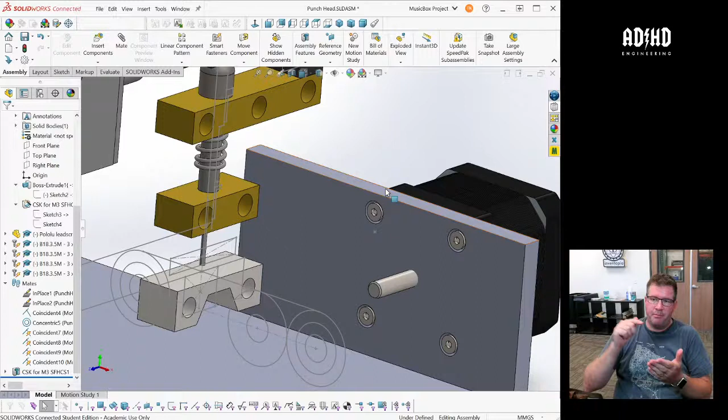I really don't like that in the Hole Wizard how it makes you select a geometry before you can put any reference geometry in there. But it is super cool that we just align the motor to the actual reference geometry and then put in the holes with the motor. That's essentially why you have that layout sketch.

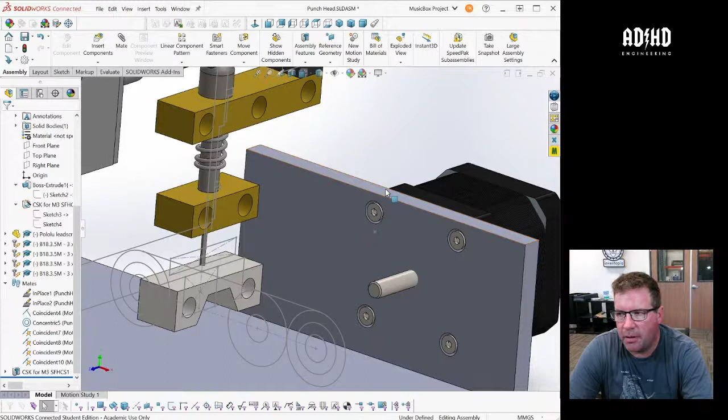It also makes more sense when you want to do everything with the minimum geometry in the layout sketch, because if the motors are in a weird place, or you get a motor with a different bolt size, I love that you can do these features that are across parts and integrate things from both parts.

Before, I was putting the bolt holes for these things into my reference geometry sketch because I wanted to use those for alignment later. Yeah, you don't really need to. Yeah, that's cool.

Awesome, alright, so where are we at? What's next? We're gonna end this in 4 minutes. Were you gonna open the shaft or no? Let me see. I started, but if you only got 4 minutes maybe it's not worth it. Let's save that. It's funny, I got into the common space, and that's not your project. This is all hardware. I don't see it. Let's do that next week.

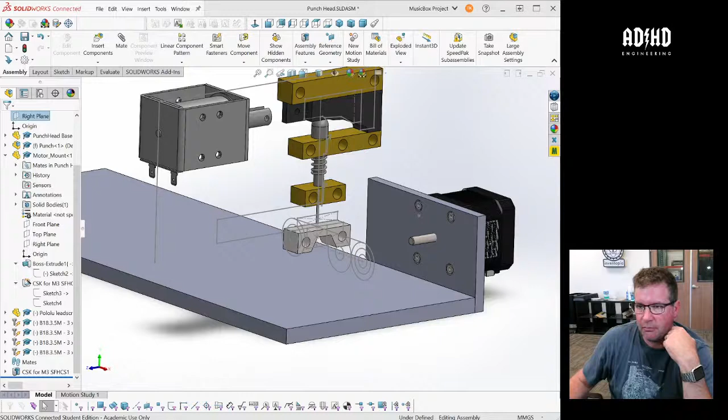So we should try in the intervening week to pull up and share it with people on Discord, kind of like what the CAD standards are, and mention some of these assembly features and how we lay things out here with the music box. The first thing we did on this stream was show how the reference geometry nests. This isn't the music box, it's just the punch head, a subassembly, but we should try to start codifying this so we have a working understanding of how it's all going to go together.

Yeah, I think it's a great idea. We were going to use the crankshaft as an example, but unfortunately I died out. We can figure out something though, I think it's a good example to start with as a working model. Okay, let's do that for this week, that'll be my goal.

And then you'll be rebuilding a new computer with liquid cooling. Oh man, this thing is gonna get liquid cooling if I get anywhere near the river anytime soon. I'm about to throw it in, fully submersive liquid cooling. I saw Linus Tech Tips did that on a laptop not too long ago. Did it work? It wasn't very practical, but it worked, I think.

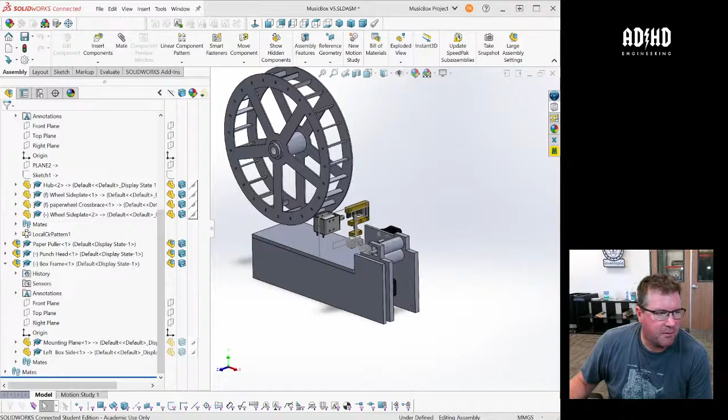Sounds good. The punching head is to make new tape for punching the music, and then you'd be able to swap it out and play it back with the same machine, just swapping out this head and having a playback mechanism. That's a module that pops in and out.

So the solenoid is to punch holes in the tape. Yeah, the solenoid may not be strong enough. I have Dan Carroll supposed to be measuring the force it takes to punch. I know the specs for this, how much force it exerts, but I need to line it up with the real world. If it works this way, it's mechanically very simple, but solenoids aren't that strong, so I don't know if this would do the job. There's been a lot of discussion trying to make a MIDI interface for the MMX with solenoids, and everyone's been like, maybe not. Either you have a very short stroke or very low force.

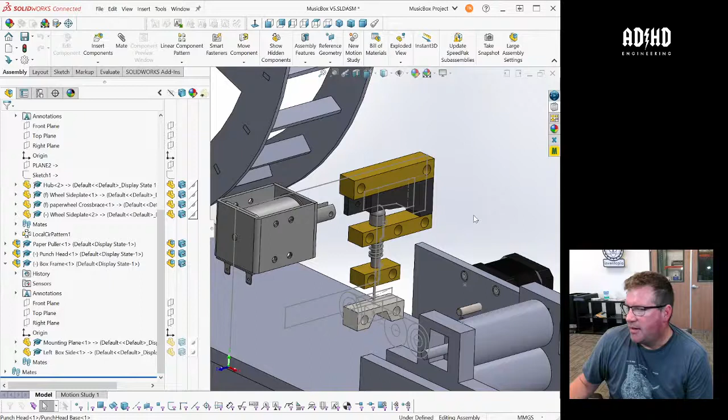Right, so it's all about pneumatics these days. Alright guys, thanks again, and we'll chat next week.